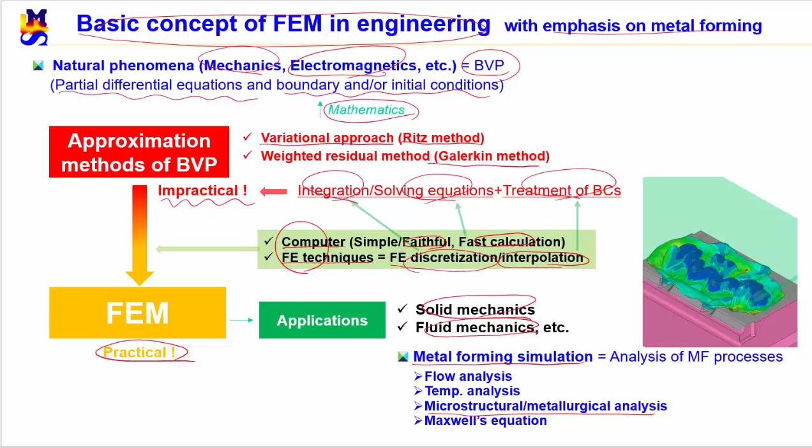These problems could become solvable by computer and finite element techniques. Computers are characterized by fast calculation and faithfulness, while finite element techniques are characterized by finite element discretization and interpolation, that is, finite element approximation. With the assistance of these 2 factors, the approximation method came to bloom in the 1960s to be applied to solid mechanics and fluid mechanics. In metal forming simulation, we are capable of predicting everything related to mechanical, thermal, metallurgical changes during metal forming based on the computerized analysis method with proper mathematical models of the process.

Now, let me define the problem of metal forming simulation. There are 3 laws of nature involving laws of mass, momentum, and energy conservation. They are formulated by governing equations called the equation of continuity, the equation of equilibrium when the acceleration term is neglected, and the equation of conduction, respectively. Through finite element approximation, they are transformed into a set of linear or nonlinear equations of which unknowns include only fundamentals such as displacement or its increment, velocity, temperature rate, hydrostatic pressure, depending on the formulation. The other variables, including stress, strain rate, forming load, temperature, heat flux, and the like, can be calculated from the fundamental variables in finite element analysis.

The finite element analysis code excluding the pre- and post-processors is called the finite element solver. So commercialized finite element analysis software is composed of 3 modules, that is, preprocessor, FEM solver, and postprocessor. The preprocessor is usually connected with CAD systems and supports users to prepare the finite element analysis models.

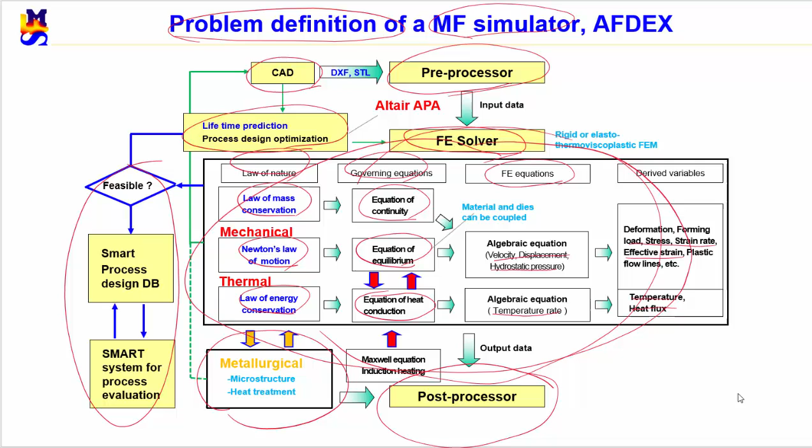Now, let us expand the concept well established previously from a one-dimensional problem, as summarized here, to the problem on the two-dimensional plane. You know, a 2D problem is mathematically the same as a 3D problem. The differential equation on the two-dimensional plane corresponding to that on a line segment is Poisson's equation, as formulated here by second-order partial differentiation. We have some simple but typical boundary conditions, that is, this essential boundary condition and this natural boundary condition. This Poisson's equation is sometimes utilized to formulate steady-state heat conduction problems, seepage problems, lubrication problems, and so on.

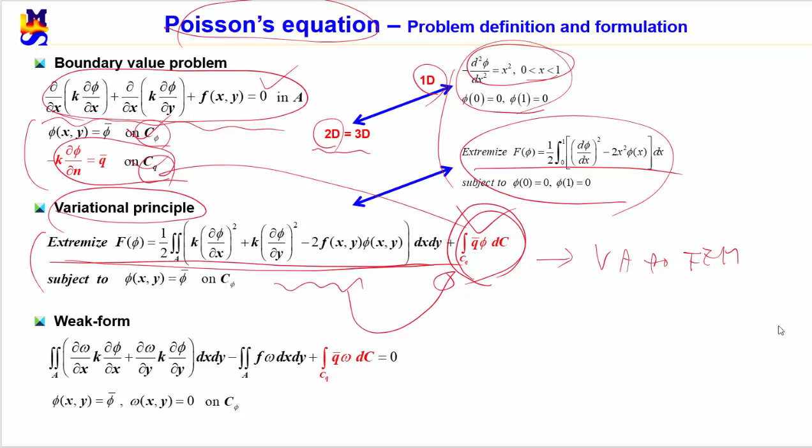Its corresponding variational principle is formulated like this. The last term of this functional is owing to the natural boundary condition. You can see at a glance that the patterns of these two functionals are almost the same, excluding this natural boundary condition term. Anyway, it is very interesting that the natural boundary condition disappeared with this evidence left. When we start from this variational principle, we will arrive at the variational approach to the finite element method. The weak form of the boundary value problem can be formulated like this. You can see that the natural boundary condition was also embedded into the integral equation, as can be seen here.

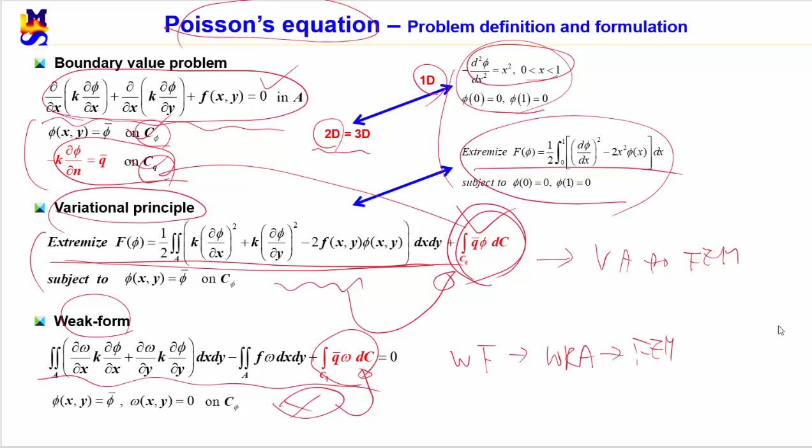When we start from this weak form, we will arrive at the weighted residual approach to finite element method. The solution domain on the plane is discretized into quadrilateral and/or triangular elements, as can be seen here. We are going to use these finite elements with emphasis on node J to explain the interpolation function on the two-dimensional plane.

Let's first configure a bilinear interpolation function Nj(x, y) defined at node J. The function has non-zero value only over the elements which are defined by the node J. You can imagine that the interpolation function Nj changes with nodal values of the node J. Similarly to the one-dimensional case, the interpolation function value Nj(x, y) should be unity at that node and 0 at all the other nodes.

The function value along the edges of elements, for example, four edges in this case, varies linearly with the distance. Therefore, all subfunctions defined along the edges should be straight. It is also interesting to note that the subfunction should be straight, which is defined on any line segment connecting two matching points on the opposite sides of a quadrilateral, which have the same normalized length along the edges.

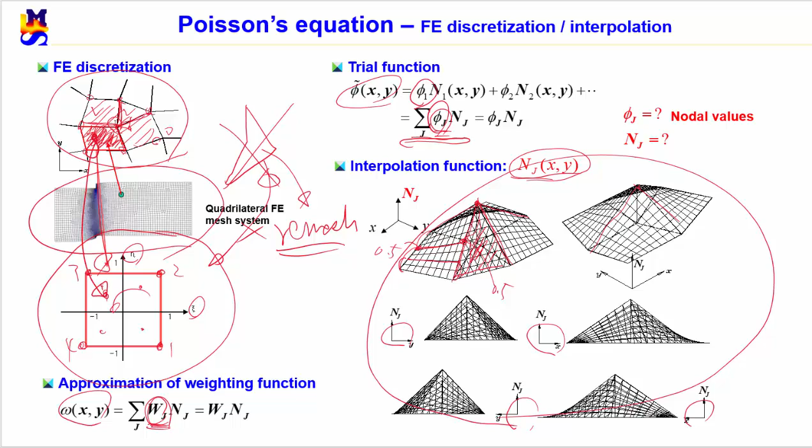Now, let's derive the final equation from Galerkin approximation using these approximations. Substituting this equation into the weak form, we obtain this equation, an identity equation with respect to the nodal weighting constant. Eventually, we obtain a set of these finite element equations just before applying the essential boundary conditions. In this finite element equation, Kij and Fi are stiffness matrix and force vector respectively, defined by these equations.

So it is interesting to note that they are using the same terminology of stiffness matrix even in fluid mechanics or thermal engineering. Applying the boundary conditions, we get this finite element equation where the bar on an index is used for the nodes on the essential boundary condition.

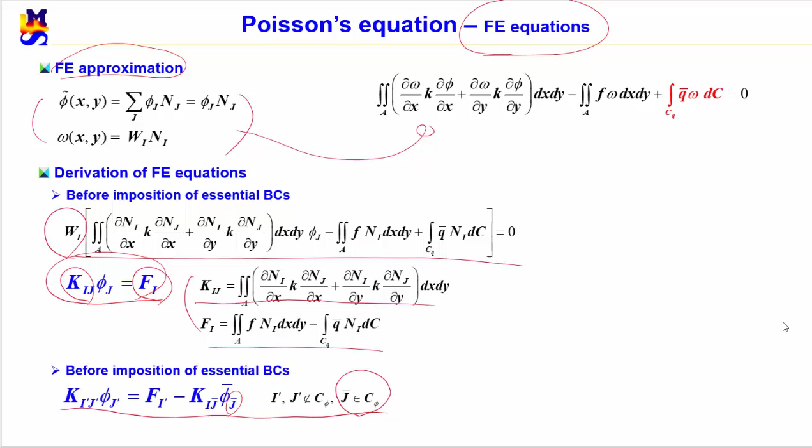Now, let's study finite element formulation and approximation of the linear elastic problem of an isotropic material defined conceptually by this figure. The solution domain is composed of volume denoted by V and its surface denoted by S. The surface S is divided into essential and natural boundaries denoted by Su and St respectively. Its associated boundary value problem is formulated by this equation of equilibrium, Hooke's law for an isotropic material, and strain-displacement relationship. The vector functions with bars represent the given functions.

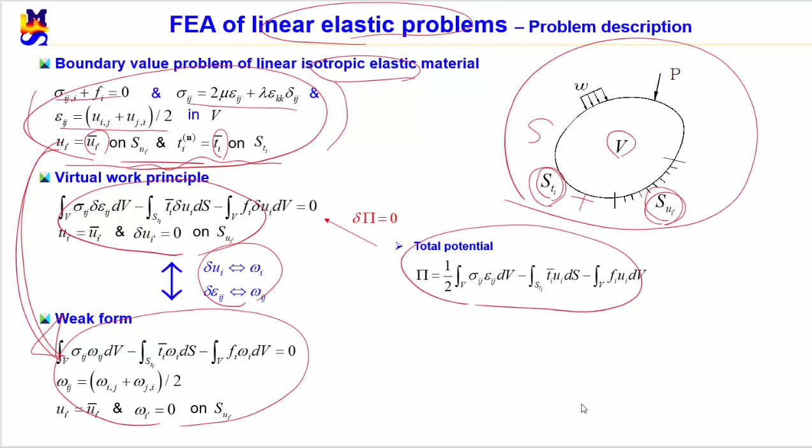This formulation is the virtual work principle, the necessary condition of the total potential energy theorem for a 3D elastic body. Replacing virtual displacement by weighting function, we can directly obtain the weak form corresponding to the boundary value problem formulated by Newtonian mechanics. Of course, we can derive this weak form directly from this boundary value problem in the formal way we did for the one-dimensional case. Please refer to any kind of textbook for some more detail about it.

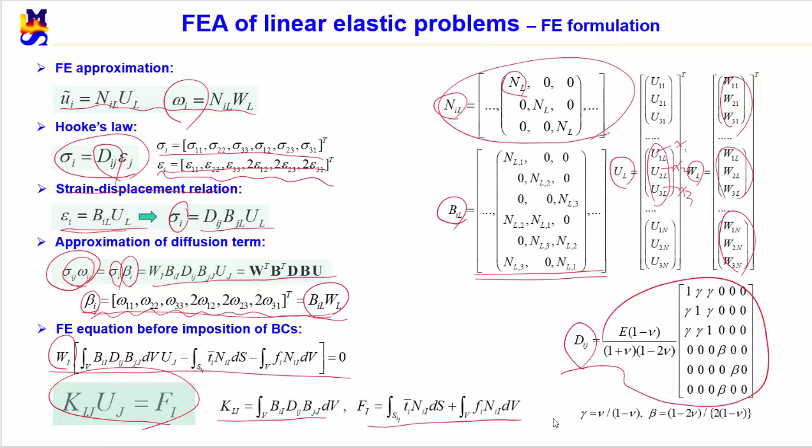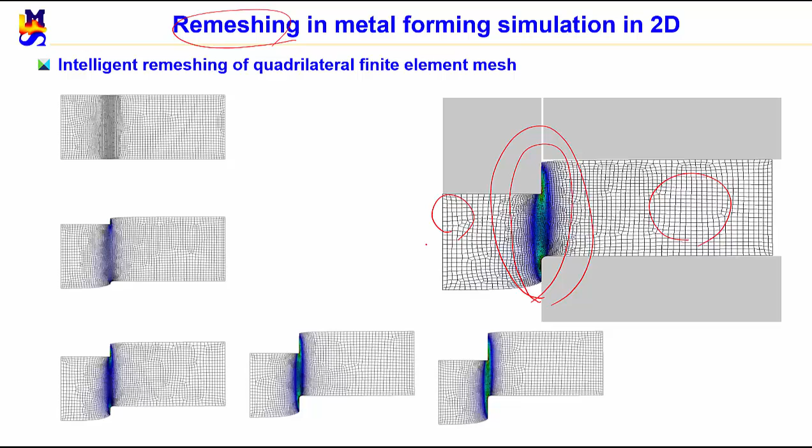Of course, mesh density is also important for solution accuracy. In the case of piercing process, the shearing region should be finely meshed, while quite rough finite elements outside of the major deforming region have negligible influence on the accuracy of predictions. We call our metal forming simulation intelligent metal forming simulation because we employ optimized finite element mesh systems regardless of user's request.

In this slide, I'm going to show you some excellent finite element mesh systems, which can give you some insight on the intelligent metal forming simulation in terms of accuracy and reliability. As I mentioned, some problems are caused by remeshing, leading to inaccuracy. The number of remeshings should thus be minimized when remeshing should be done because of severely distorted element or mismatch at the interface between material and dies or tools. The boundary conditions should be kept. It is because we are solving boundary value problems. Obviously solutions depend on the boundary conditions.

In this figure, blue color means free surface. In this simulation, we maintain higher mesh density along the boundary of contact interface as can be seen in the isolated region. You can see how we treat the mesh density along the periphery of the free surface while it disappears. To reduce the number of remeshings, we'd better not use too small elements because they are exposed to becoming degenerate elements due to locally severe distortion, which leads to frequent remeshing.

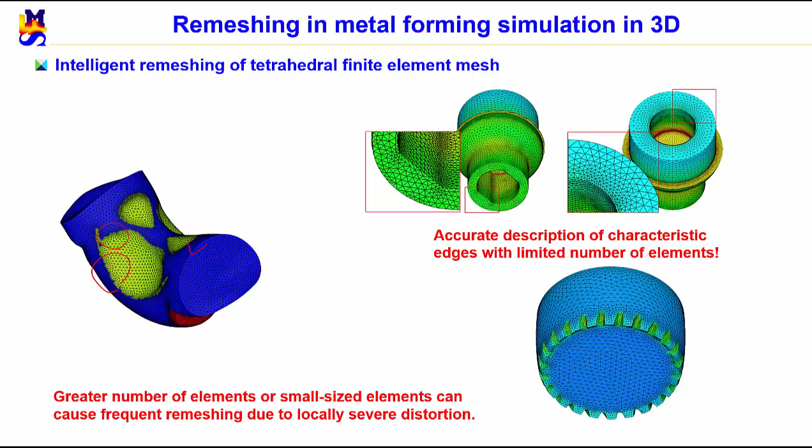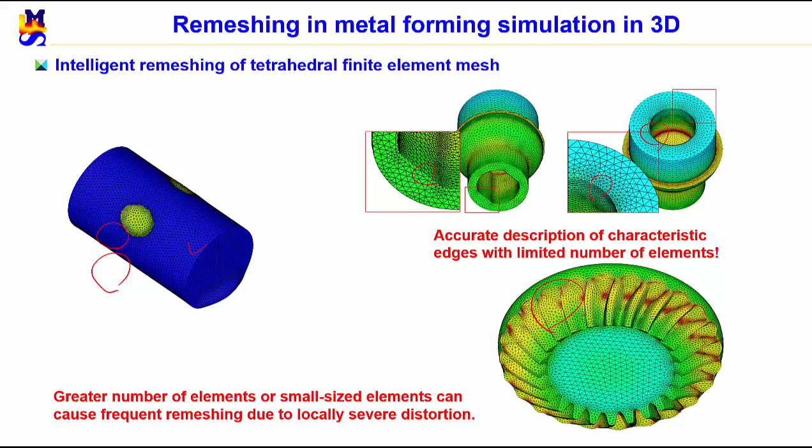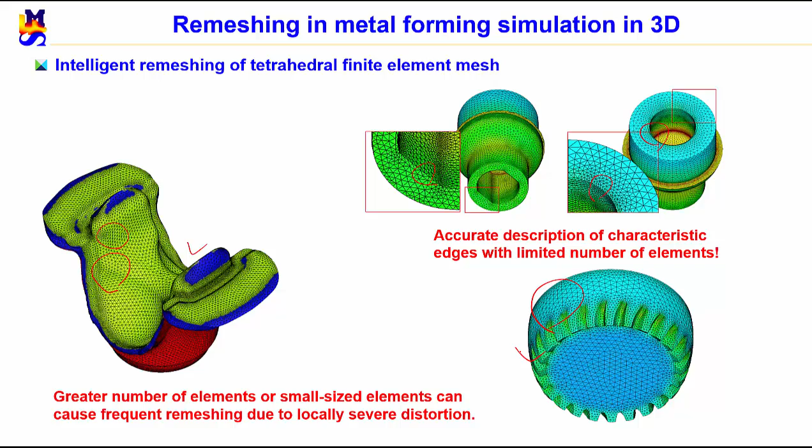To the contrary, we have to use some skillful and special function to describe the characteristic edges, curves, or surfaces of material for higher accuracy, with properly limited number of elements. These examples show such model cases of good mesh system for metal forming simulation. It should be noted again that higher number of elements in metal forming simulation, especially densified around the major deforming region, does not guarantee so much high accuracy because of frequent remeshing.

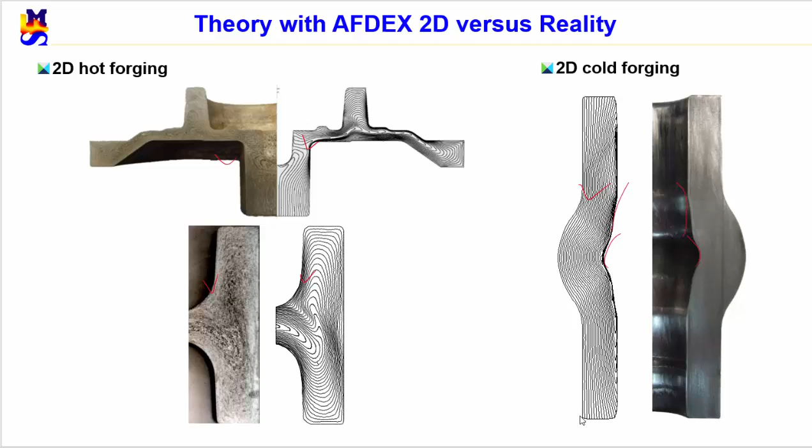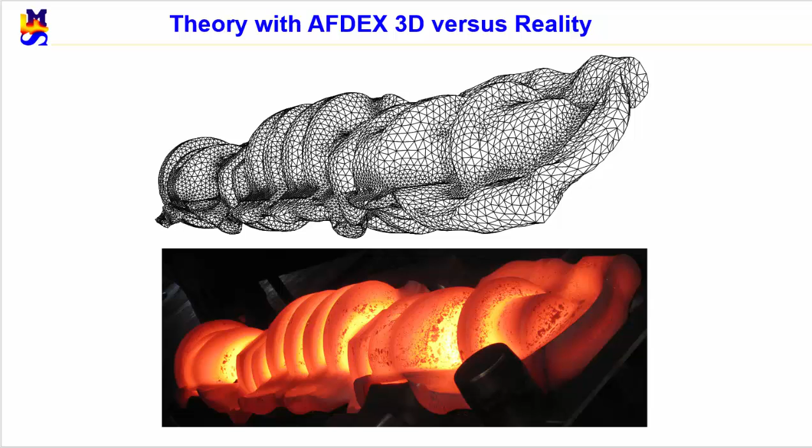This is for comparison of predictions with experiments of counter-blow hammer forging of a crankshaft applied to medium-sized ship engine, sometimes used for power generator. So it is concluded that the predicted shape is very close to the experiment, which can contribute to removing the costly and time-consuming process and trial